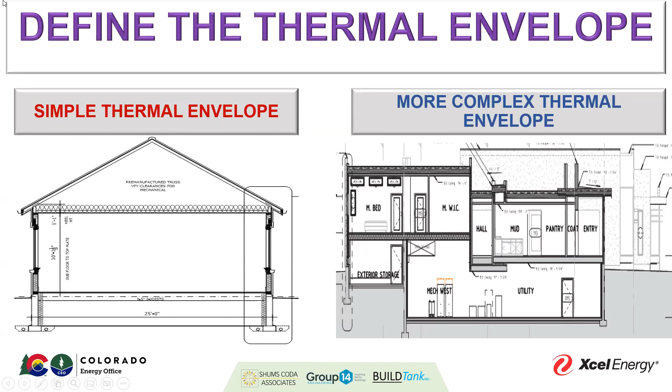There are also some areas where the thermal envelope is extremely important for me, as a plans examiner, to know how to treat—and down the road, the contractor/builder knows how to treat these spaces, and the inspector knows how to treat these places too.

And it happens to be situations such as the crawl space. If that crawl space is going to be a vented crawl space, hopefully not, because vented crawl spaces are not a good design. But if it is going to be, then that means the floor areas should be seeing insulation and the definition of that thermal envelope.

Or the garage. Is that garage being conditioned? If the garage is being conditioned, then I need to see that those exterior walls of the garage are part of the thermal envelope and have the required above grade insulation values. Or is it the walls separating the garage from the dwelling unit? That may be where the thermal envelope lies.

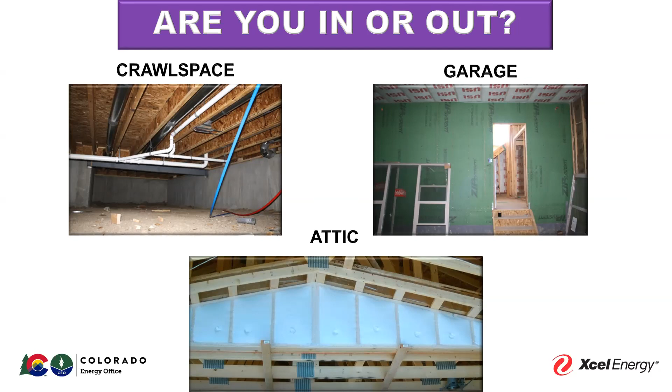And then attic spaces. Is that attic going to be a conditioned attic? If it's a conditioned attic, then we need to be seeing that it's included within that thermal envelope. Another area is fuel burning appliance rooms. If you are bringing outside combustion air into these particular rooms, then they need to be thermally isolated or completely located outside of the thermal envelope.

So knowing whether this is in or out and having that thermal envelope defined is really going to make a huge difference in how I'm going to look at these plans as a plans examiner. Contractors know how they need to treat those particular areas. They have to pay attention to them. And then also the inspector is given the information as far as making sure that all of the requirements of R402.4.4 are being met.

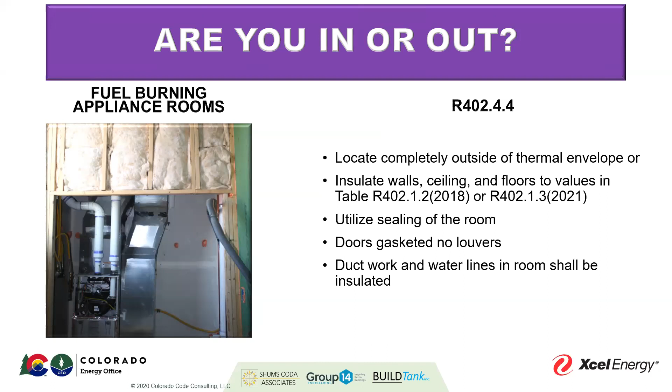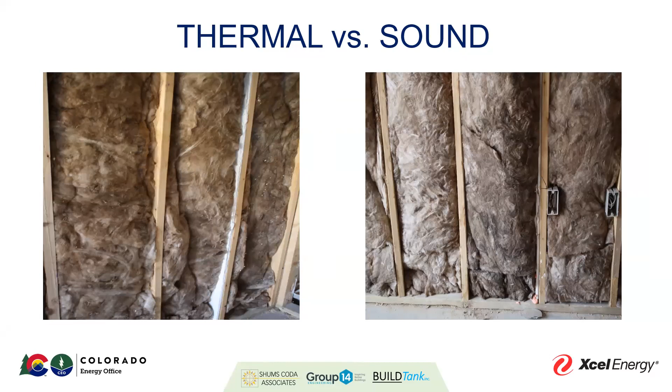Now, when you look at insulation, you can't tell whether that insulation is being utilized for thermal or whether it's getting utilized for sound. So it would make a lot of sense, I've seen where, if the sound insulation is being placed in the floor, they'll just put a little note that says sound. So you can still use a section to define your thermal envelope, but just put a notation in that floor system saying insulation for sound. Actually, they just put it as sound, like exactly what you would see right here.

And you might not think that defining the thermal envelope actually makes a whole lot of difference, but I just did a plan review yesterday where in the first round of comments, I asked for the thermal envelope to be defined, and I ended up adding an additional 4 comments to that plan review just because how they had defined the thermal envelope was incorrect. It's actually so incredibly important and encompassed quite a few of those items we just discussed.

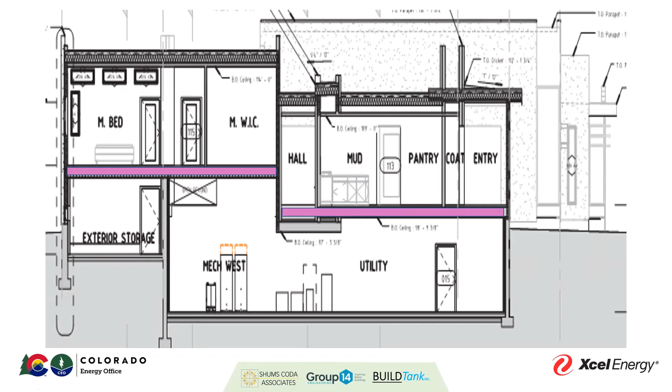Okay, so we've covered the compliance path, the thermal envelope. Now we're going to hit the nitty gritty of the insulation materials and the R values. We should be getting information, whether it's on the plans, in a REScheck, or in a performance report or an ERI report, that tells me exactly what is going to be utilized. I need to know what the R value is and what type of insulation material is going to be utilized.

And the reason partially for that is we have to remember that the energy code is not a code that's on an island and just functions by itself. It works within the I codes family. That entire suite of codes all work together. So there are provisions that you're going to find within the IRC and the IBC. And I mention IBC because there are projects that are going to be built out of the IBC that are going to follow the residential provisions. There are requirements in there that actually we need to make sure that our insulation and our thermal envelope are working together to create a very healthy, safe structure and not causing a potential issue with these particular assemblies.

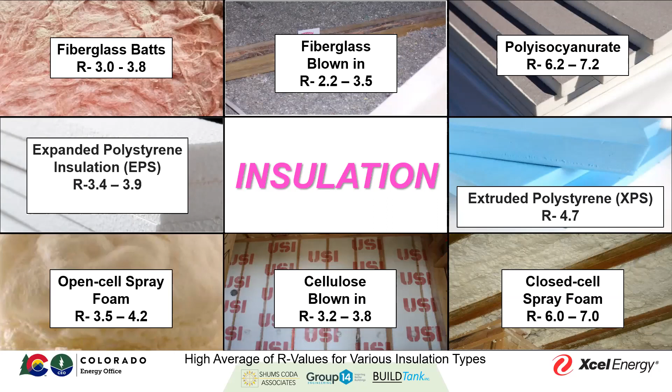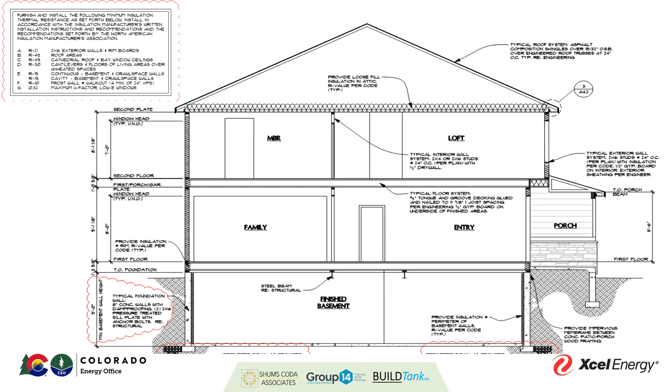If the contractor doesn't know that you traded off that wall value for better windows, and they get windows that were supposed to be 0.28 but got 0.30, and the code says 0.30 on here, they'll think they're okay with that. It needs to be very explicit and specified out for everyone.

Here's one of my favorites, a builder who creates energy sheets. These energy sheets provide a lot of information. I can trace the thermal envelope, and they tell me exactly what the R values are for the floors and walls. They have a note about their windows and glass doors being 0.30, with a solar heat gain coefficient we'll talk about in a minute. Plus they had a section of notes on the page pertaining to the type of insulation that's going to get installed. This builder really embraced the energy code. They're a tract builder who does an excellent job, and I love getting plans from them.

So we've talked about the insulation component required. Let's take a look at fenestration. Fenestration, quite often in my opinion, unless it's listed on a REScheck or in a performance report or an ERI report, isn't often called out. People just assume we're going to put in whatever the value of the windows are.

But we have to be a lot more mindful of it, because in the 2018 code, for many locations within Colorado there was no requirement for a solar heat gain coefficient for residential. In the 21, there is now a requirement for a maximum solar heat gain coefficient for all glazing. So we now have to be very mindful of it. We have two determining factors that need to be provided.

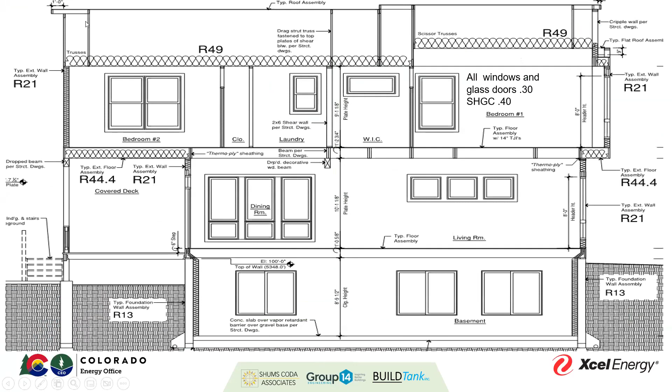So when it comes to submittal, placing some sort of note like what you saw on that previous screen, or including it into the window schedule, since a lot of times we get window schedules even on the residential side providing that information, create an additional column - actually two columns - for the U factor and the solar heat gain coefficient. Then you have one location where everything is found, which is a huge benefit.

Another option I've seen is placing it in a note section, like this builder's energy code compliance note section. The really nice thing is this particular builder doesn't try to cram a whole bunch of notes on one sheet.

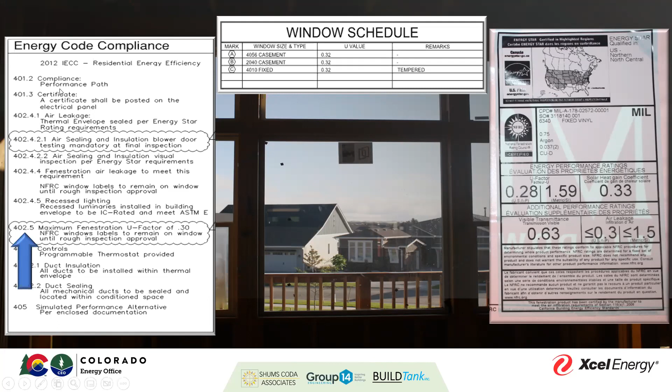This is very specific to their energy sheets, and they make it very readable, large, so nobody has to get a magnifying glass to figure out what solar heat gain or U factor those windows should have. And then it makes it really easy for the inspector to go out and make sure that we have the correct information.

Now, another document that may be submitted, and I see this more being utilized for alterations on an existing building, is utilizing that area weighted average. That's where you take the U value for one area, multiply it by the amount of area that value has, and so forth. Then you add up all of the U values, divide by the total square footage, and that gives you your average area weighted average U factor value.

I don't see it getting particularly utilized for new projects, because the glazing industry really has taken hold of the energy code and provided a whole lot of glazing and fenestration options that they are producing, so the requirement or option for that area weighted average is not as pertinent as it may have been in the past.

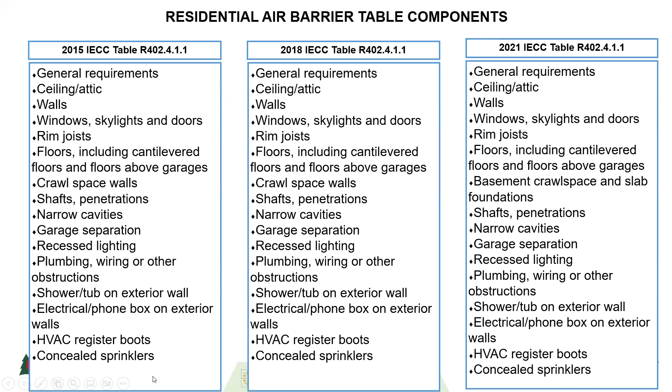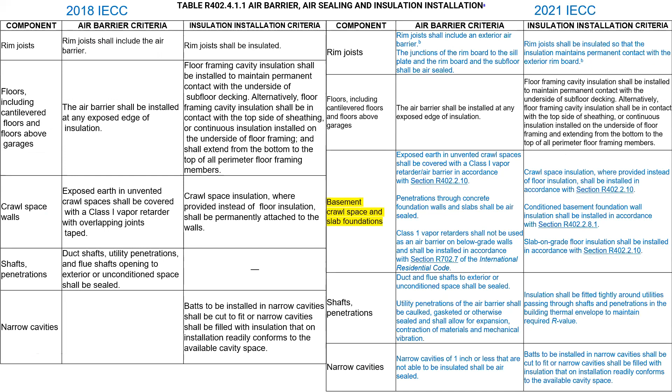So here are examples of how they have changed, or how they're very similar, going side by side, 18 to the 21. Where you see the blue in the 18 is where there were changes from the 15. This table gets changed every cycle, and the reason is because there's always an effort to make it more usable for everyone.

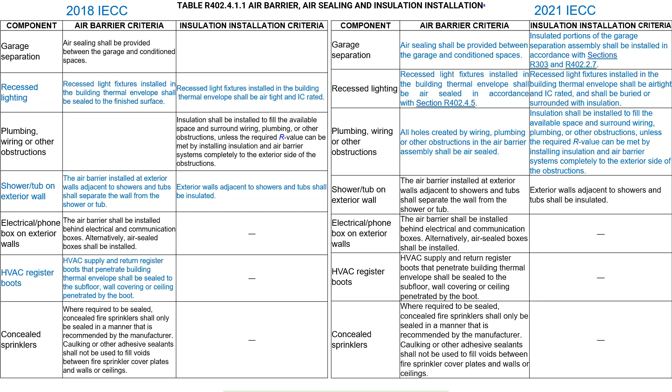Because when we go out into the field, inspectors, plans examiners aren't getting the correct information, the contractors aren't getting it, and when the raters go out doing their testing and verifying, they aren't seeing it out there. So Robbie, our local rater guru, works on this table every single cycle to make it so explicit and user friendly, to really make it easier for everyone.

All right, let's give it a minute here. It looks like it goes up and goes down. It goes up and goes down. Okay, so we'll cap it here. We've got about 20. Okay, and then lower your hands.

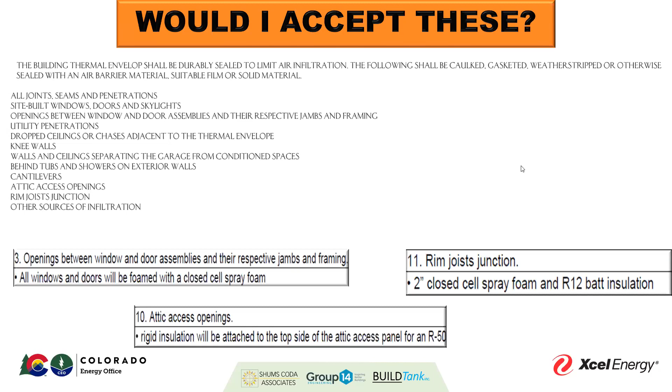Yes, that's excellent news, because here is what I will tell you, and this is what I accepted. These are from plans that I received. And so the top one, absolutely not. Going out there and seeing that top one, that does not provide any guidance, any information really for the contractors and builders to be successful in creating air barriers that are permitted by code and not creating an unhealthy situation.

Now, the bottom ones, even though 103.2 specifically states that details are to be provided for these particular ones, because they were very good at basically explaining it step by step, I did accept these as options in demonstrating compliance with the components of that detail.

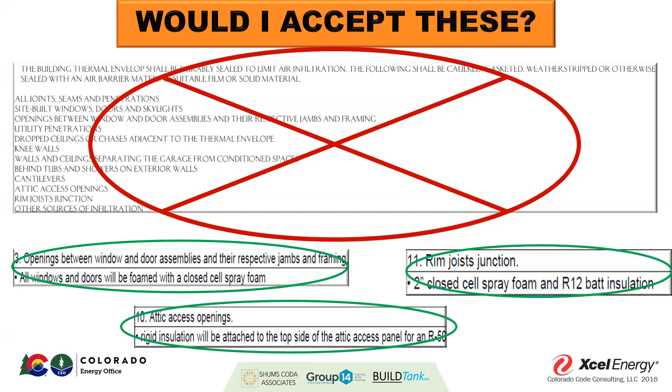Like I said, a picture is worth 1,000 words, and it's extremely useful. If you were to look at the words listed in the bottom, they are very prone to interpretation, right? Because is it a 2-inch spray foam and an R12 batt insulation? Are you putting the batt R12 in and then 2 inches of spray foam? There's a lot of possibilities when you put it in words, as far as how I read it, how you read it or intended it to be read, how the contractor reads it, and how the inspector reads it.

This makes it, in my opinion, very clear exactly how you designed it. You go through plan details of how you want walls built, to make sure that the contractor does it exactly the way that you want it. And we need to make sure that we include the components of an air barrier, because if you think about it,

we don't want to have a situation where the inspector or the contractor had that top one that just said, hey, create this. The inspector goes out and says, oh, no, you can't have it this way. It actually will cause an issue with, we'll just say, the wall. And so now the contractor has to correct it. Well, that just cost the contractor obviously time and money, because now they have to take the time to remove what was not approved. They have to get the new material to fix the issue.

All of that costs them time, because we know that the crew is not just sitting around waiting for work to be thrown on them. Chances are they're already at a different site. So now they have to wait for somebody else. And it's also an additional inspection in time for the inspector to come back out, where we could have potentially eliminated that issue by having these details readily available.

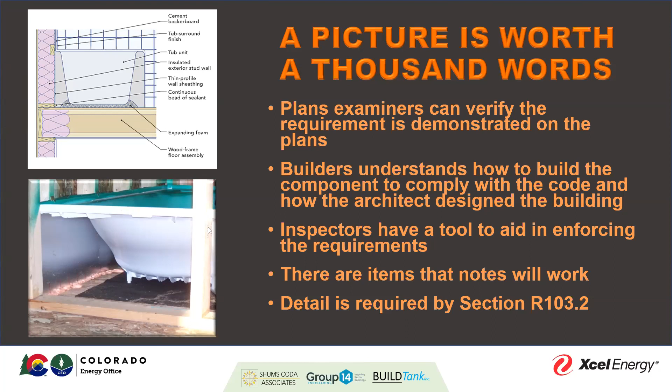So my next poll I would like to do, Erica, do you happen to have that one? I do. Would you mind pulling it up? The energy compliance path.

No, it would be the air barrier locations. Okay, gotcha.

There you go, wonderful, we are live. So this question is really pertaining to you as an architect designer. How do you typically show air barrier, air sealing as a plans examiner? What are you typically seeing as far as that information being provided to you? As a contractor, how is that information getting portrayed to you? And as an inspector, where are you finding this? So no matter what position and role you take in construction, how are you seeing these air barrier, air sealing components being provided for you?

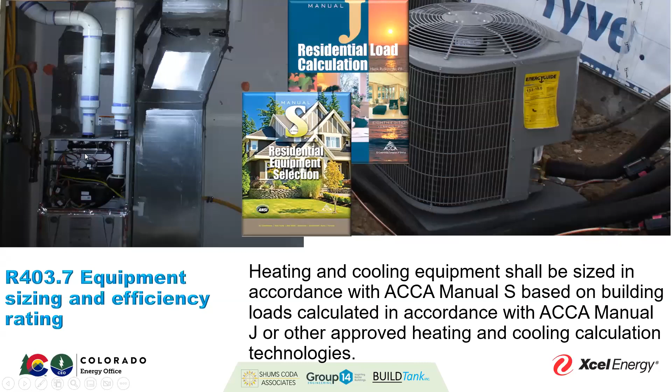So here's one of those items that you get asked about often, and that is the requirement for a Manual J, a Manual S, and a Manual D. A Manual J is the calculations that are utilized for your heating and cooling loads. A Manual S is sizing the equipment in accordance with those heating and cooling loads. And a Manual D deals with the ductwork involved, the runs, the size, the location, the insulation, the fittings, the turns - all of that good stuff should be included in that Manual D.

Now, this is one of those times where both the IRC, the IMC, and the Energy Code all work together and require that the same information be provided. So as you can see, what you see on the screen is actually somewhat of a carbon copy of the requirement out of the mechanical section of the IMC or the IRC. So we should be receiving all 3 of those particular reports. They've actually been in the code - the Manual J and Manual S have been in the code since the UBC 1992. So this isn't a new requirement by any way, shape, or form.

It's just probably getting more highly popular, or maybe unpopular, depending on how you look at it. Because really where we get our energy efficiency, that tangible return on investment type of energy efficiency, is our mechanical equipment, our service water heating equipment. And that's because by having our equipment sized appropriately, having the correct efficiency installed, and having a good design if you are utilizing ductwork, is actually going to lower the utilities, the amount of energy that is required - which should lower your utilities, in the sense that if you just put in a minimum and you didn't do the sizing, you're like, oh, it should be a 4-ton, when reality is when you do the heating and cooling loads, it's a 2-ton. Yeah, you've doubled it, right? So these are the type of items that we need.

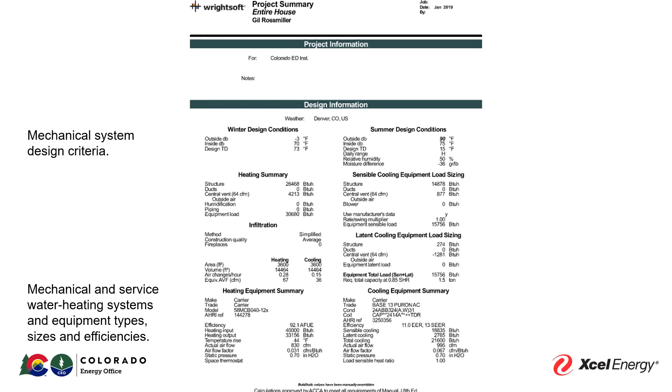Now, here's an example of how a Manual J should look like, what we should be getting on this. It lets me know a whole lot of information. And sometimes the thing that isn't actually put on there would be something like sealing the ducts and joints, or the ductwork, making sure that the air handler is sealed. And I'll see that quite often actually as a note on where the information is for the mechanical equipment.

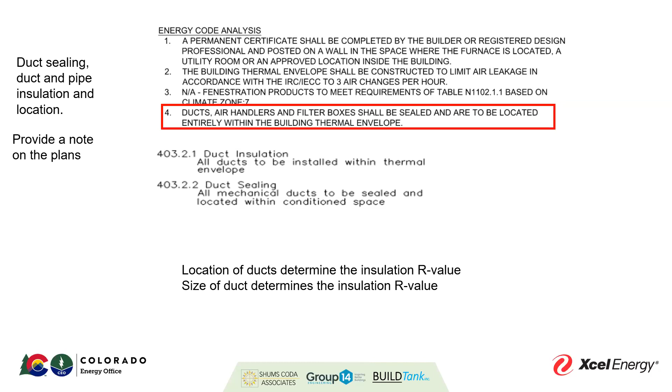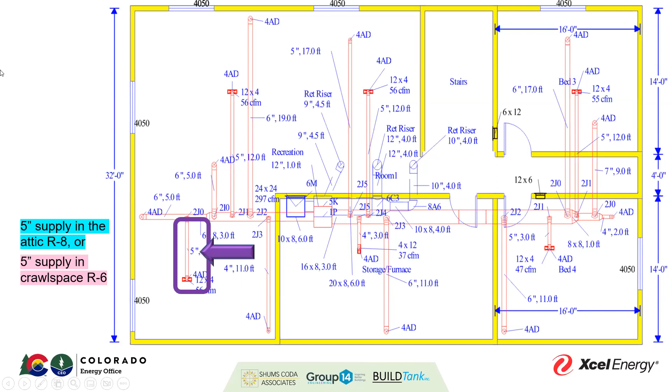Another thing this duct design gives me is, if this ductwork is located outside of the thermal envelope, I know how much insulation is required, because the Manual D tells me what size of ductwork it is. This particular run is 5 inches. If it's located in the attic, it would be required to be insulated to an R8. But if it's a supply run in the crawl space, it's only required to be an R6. So this can provide a whole plethora of information for everyone.

Now, one thing I'll caution you on is we may get all of these documents, but we have to keep in mind we need to have the conversation, because everything needs to match. Whatever's listed on the construction plan should match what's on the energy compliance documents, which should match what's on the Manual J, D and S. And often this isn't the case.

A lot of times I hear that Manual J, D and S values are way off from what the other two are. And it's not because they're trying to pull a fast one in any way, shape, or form. We all know things evolve when construction happens, whether we have to change something because we can't get that material in, or the owner decided they wanted R40 in the walls instead of R20 in the walls.

Whatever it is, things will get changed on the plans, things will get changed with the compliance document. But typically that Manual J, D and S is done at the very beginning, when the project is just starting off - here are the values we're going to do. And then the changes don't necessarily get transferred over to whoever did the Manual J, D and S.

So communication is going to be very important. If you change something, let whoever does the Manual J know, so they can adjust it within their system too. Because it's really easy for them to change out a couple of components than to have it submitted to the city, and the city says 'here's a whole bunch of review comments to your Manual J because things don't match,' as opposed to just letting them know to change those couple of items, and then get that Manual J out the door.

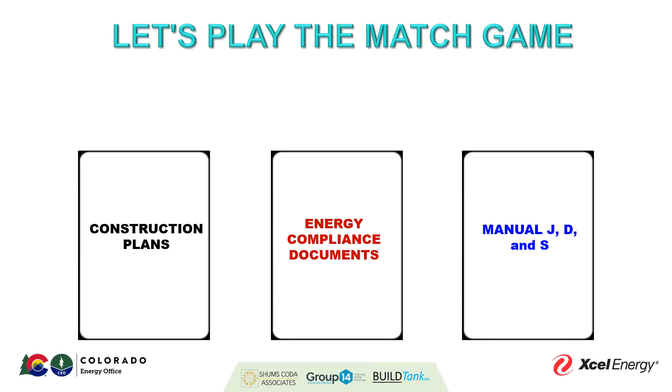Okay, so equipment and system controls. There are requirements now that we need to really pay attention to. On the 2021 residential side, we now have requirements that require interior lighting to have controls.

Now you have options. It can be a dimmer, it can be an occupancy sensor or another type of control installed there, maybe a timer. But it has to be built into the fixture. And then with that, there are a few items that have exceptions, like bathrooms and hallways. Your exterior lighting fixtures, don't worry, we'll take care of that. And any areas where lighting is designed for safety or security.

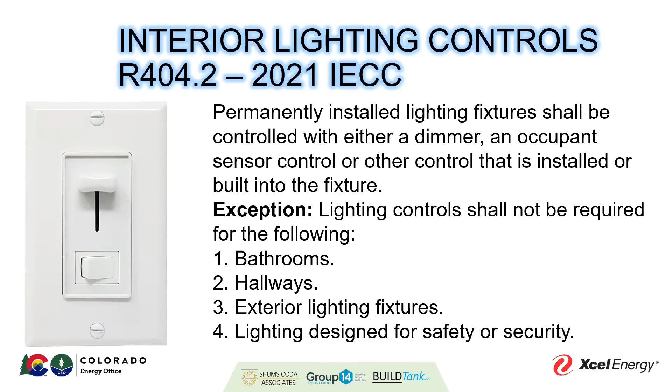Now, there are requirements for exterior lighting. So while it didn't have to comply with that first section, it does have to comply with this. Basically it says that if you have lighting power greater than 30 watts, you'll need to comply with the 3 items below: controlled by an on-off switch that allows for automatic shut-off action, but it will have to shut off when daylight is present and it satisfies the lighting needs, and then controls that override that automatic shut-off so things return within a 24-hour period.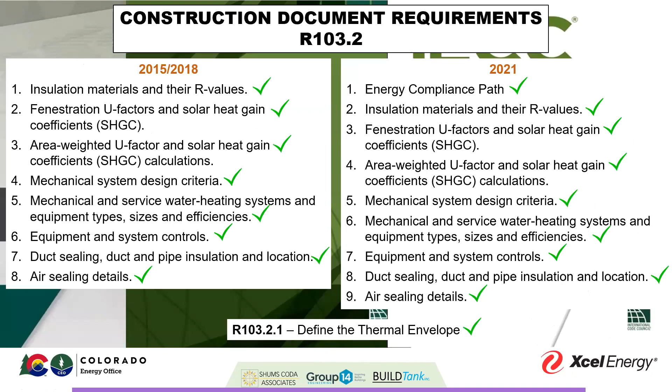Now, these are all the items required to be submitted and examples that should be submitted when we're talking about the residential side that pertains to this particular list. Now, what isn't on this list? Anybody have any thoughts on what's missing from this list, but definitely needs to be provided at submittal?

Oh, I guess it's probably... feel free to write in the chat if you've got an idea. I think I have an inkling, Hope. Okay, I think you might too. Do we have any responses by chance?

We've got solar, expanded data. So we're kind of hitting on it, but solar ready, temperature controls. All right, so all of those could very easily be listed and provided, and should be provided. If you are on solar ready provisions, there are very specific items required to be placed on the construction document. You would need to comply with Appendix RB for that, unless you've written your own.

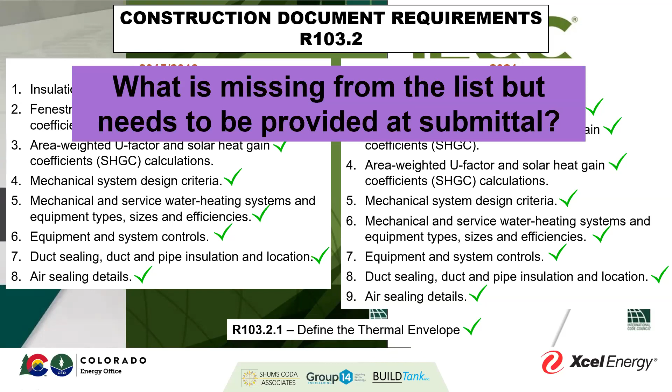But the one thing that really should be listed is vapor barrier. Remember, a vapor barrier is there to keep moisture from entering that wall assembly, or if it does enter, to allow it to leave. So this is extremely important. A lot of times what I'll see is it'll say a class 1 or class 2 vapor barrier, but doesn't tell me what it is. We have to keep in mind that the IECC actually refers you back to the sections for vapor retarders in the IBC and IRC, because it's so important to make sure we're not creating a wall assembly that's going to fail.

If you happen to have continuous insulation on the exterior, and then you put a class 1 plastic on the interior side, now you have the opportunity where you're trapping moisture in that wall if it gets in there. So we have to be mindful of the type of vapor retarder we're going to utilize, and our thermal envelope components have to work together. I think knowing exactly what that vapor retarder is, placing it on the plans, calling it out, and putting it in a very centralized location is going to be extremely important to make sure we're working together and not causing problems.

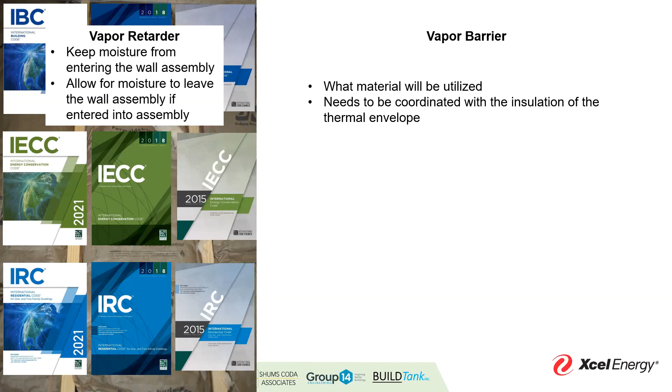Another thing that should be listed would be what type of whole house mechanical ventilation you're going to utilize. Are you going to utilize supply only, exhaust only, or a balanced system? Because that information is going to be extremely pertinent here in just a few moments. We have to remember, if we're going to build tight, we need to ventilate right.

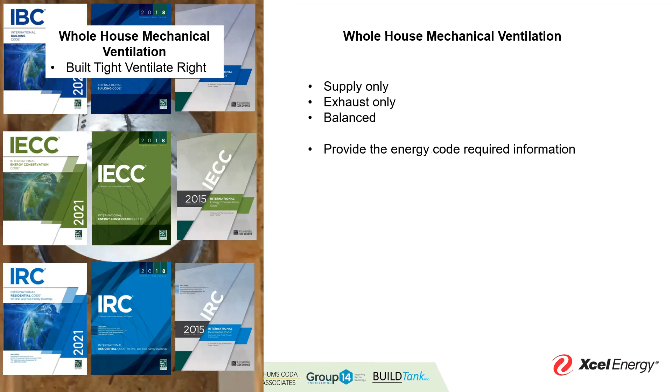The next one, which is probably the elephant in the room, is the concept of this additional efficiency package option. In the 2021 code on the residential side, we now have a requirement that you must do one of the following items if you've gone prescriptive. It doesn't matter which of the 3 options you choose, you still are required to go with an additional efficiency package. One option is to have an enhanced envelope performance, meaning you're going to meet 95% of the total UA. That may be somewhat difficult with our current values, but not impossible.

More efficient HVAC equipment needs to be able to meet those particular requirements. Reduced energy use in service water heating - remember that for both of these categories, not all equipment is going to meet these particular requirements, so keep that in mind. There's also more efficient duct thermal distribution system, and then improved air sealing and efficient ventilation system.

So my question for all of you is, which additional efficiency package do you think you're going to see more often? Or which one are you going to use more often? All right, we'll give it another couple seconds here. Okay, I'm going to go ahead and end the poll now.

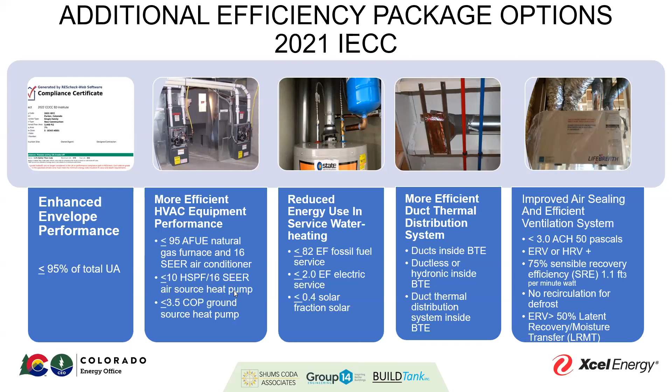This doesn't exclude the total building performance compliance path or the energy rating index compliance path. If you're utilizing total building performance, you have two ways to comply: one is doing an additional efficiency package, but you can't include it into your proposed design—it's done on top of everything you're proposing. Or your other option is to demonstrate an annual energy cost that's 95% of the reference design home. For the energy rating index, your only way to demonstrate compliance is that your ERI number is 5% less than what's in the table for R406.5.

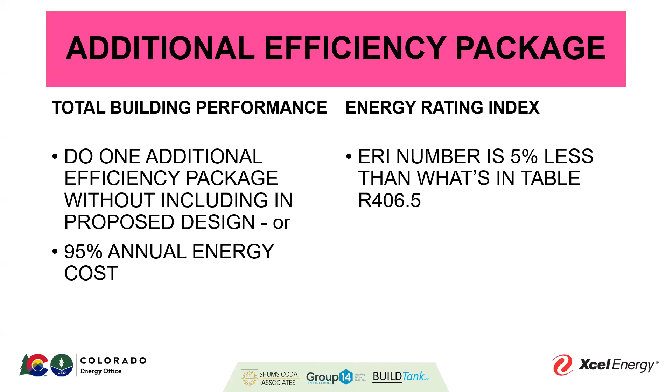I know we're getting towards the end, and I want to make sure we have time for all the questions coming in. I also want to help you help me. What can you as an architect and designer do to help everybody down the road and make it so everybody loves getting your plans? I love providing this for architects because I want people saying, hey, we got plans from them, we know it's going to be good. I don't want it to be just one architect firm that's really good at it while others aren't.

The first thing you could do is place all the energy items on their own sheet. Here's an example—this is just one of the energy sheets, they have multiple, and it provides a lot of information for me to determine exactly how to do the energy review. If I only have to go to a couple of sheets, I may not have any review comments because I can find the information. If I have to hunt and peck, I'm going to find review comments.

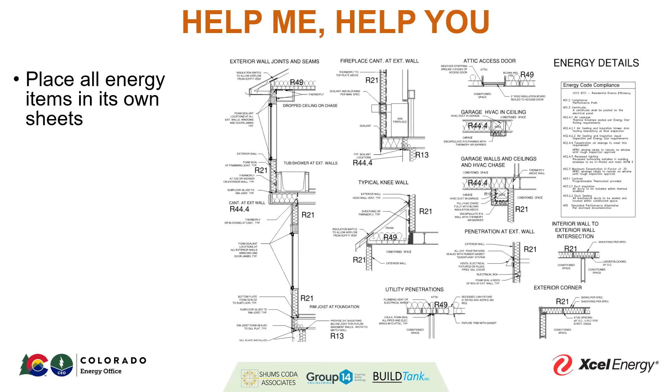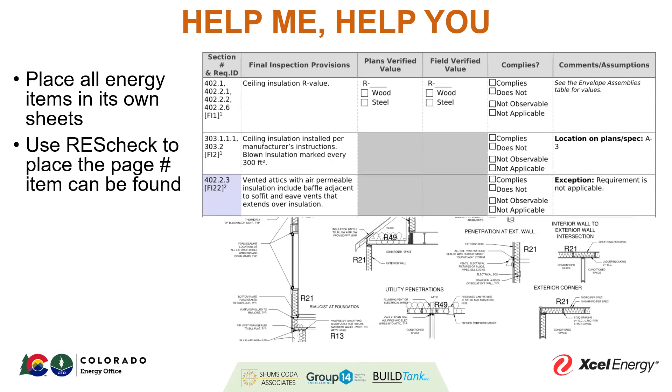The other thing is this tool. If you're going with the total UA option in the prescriptive path using REScheck, there's a nice table where, when filling it out, you click whether a requirement is met or not met. Then it gives you the option to put the reference page down, tell me exactly where to go so I know what the ceiling insulation is. I go to A3—oh my gosh, that makes my life easier. It makes your life easier too, makes the contractor's life easier, makes the inspector's life easier.

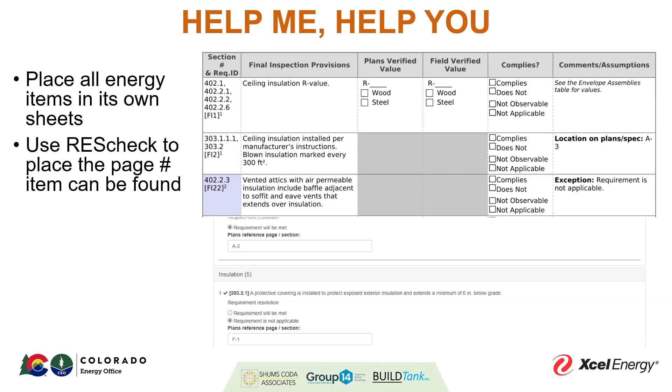Let's make energy easy. The other item is to utilize an index. With that index, you can say what the component is. It's from a company that, whenever I get plans going performance, gives me this—an index on a sheet that tells me exactly where to find it. It's fantastic, makes life so much easier for everyone who uses the projects down the road. Everyone loves getting projects done by them.

The other item is to create a code analysis. In that energy code analysis, give me all the information: tell me what path you're utilizing, the additional efficiency package, any little options in there, what you're going to utilize. Put it in your energy code analysis.

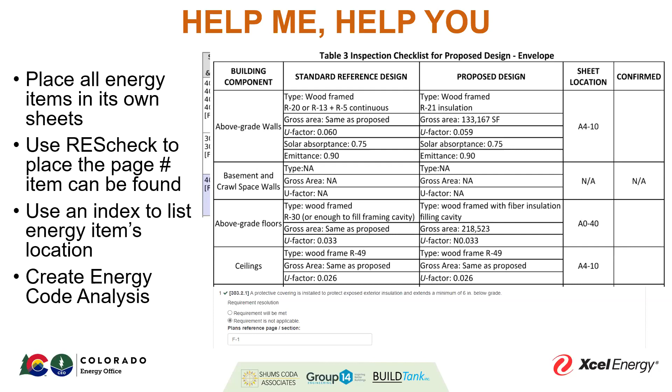Remember there are a lot of resources out there for you. Erica alluded to some resources provided within the adoption toolkit. Xcel also has a web page that provides a list of information for you. But not only that, we have a submittal checklist that if you reach out to me, I'm happy to provide. This checklist tells you exactly what needs to be submitted for plan review, broken up into various compliance paths. If you're going with the R-value alternative, it tells you everything needed for that path. If you're going with total building performance, it tells you everything needed for that. We have it for the 2018 and the 2021 codes.

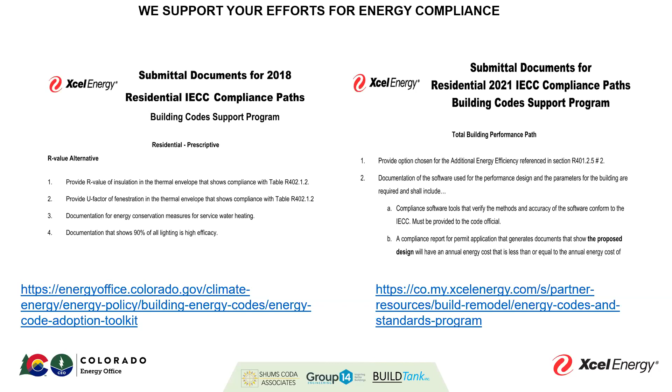And Erica, we have time for questions, I hope. We are at the hour, but if you've got a few minutes to stay on, I'm sure the attendees would appreciate that. I will stay, but I'll put a caveat on. My power's been out since before 9 o'clock this morning, so my laptop is getting towards the end of it, so I will be happy to answer questions as long as my laptop will permit it. Sounds good, we'll take it, Hope.

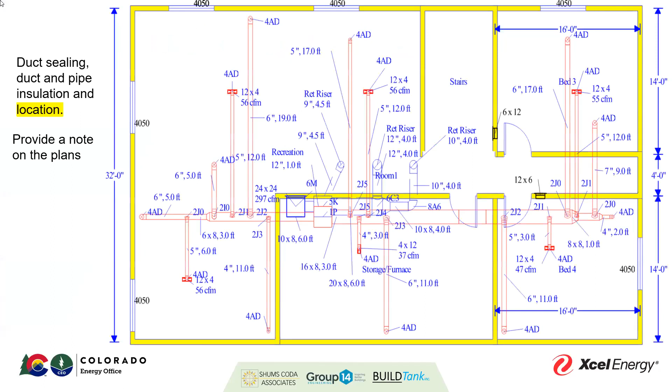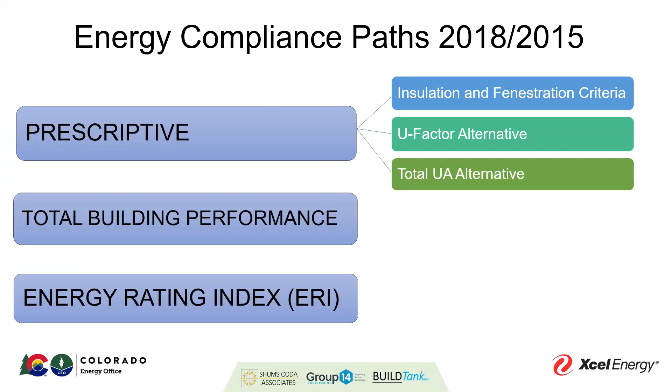If you happen to be utilizing the insulation and fenestration criteria, under the 15 and the 18, everything is going to be placed on the plans. There's no special reports that are going to be required for it. So you're going to put the R values, the materials, all of that's going to be listed on the plans, and the information for the fenestration is going to be on that. Now, if you're under the 21, the same would be said if you're utilizing the R value alternative, because remember that these particular options flip-flopped in the 21. I hope that answers the question.

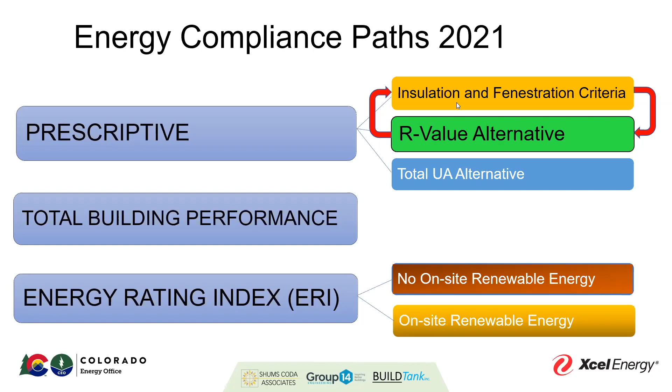That is an excellent question. So when we start talking about accessory structures, if you go into chapter 1 and it talks about when the energy code is required - if the place is being heated at that point or conditioned in whatever fashion, it would be required to comply with the energy code. And without having direct access to my code book right at this moment, I apologize - it used to say that if it was an accessory structure... there's a lot of code proposals that talk about getting that included. I believe in the 24 it will be very explicit that accessory structures will be required to comply. I know that's not exactly answering the question.